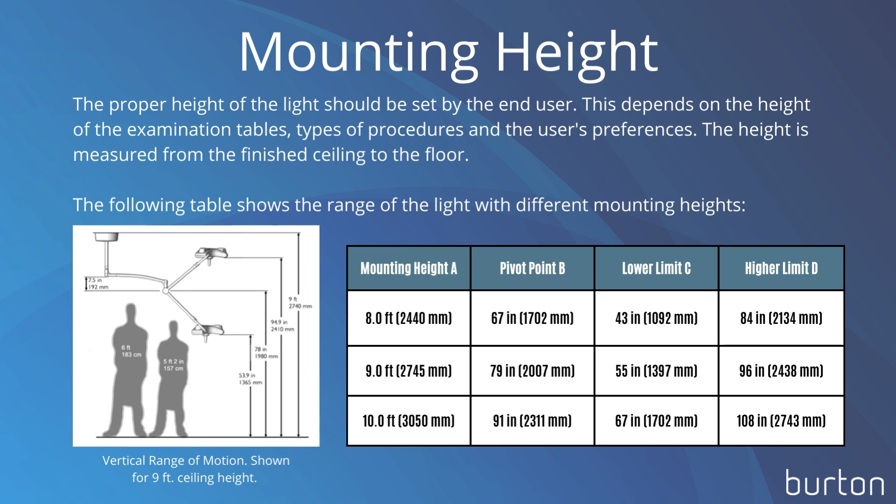Installing the wall mount, mounting plate. This image shows an example of a mounting plate, which requires a minimum thickness of 3/16, which can be used to mount the wall mount. The attachment method will vary depending on the type and structure of the wall. Please note that the mounting plate is not included.

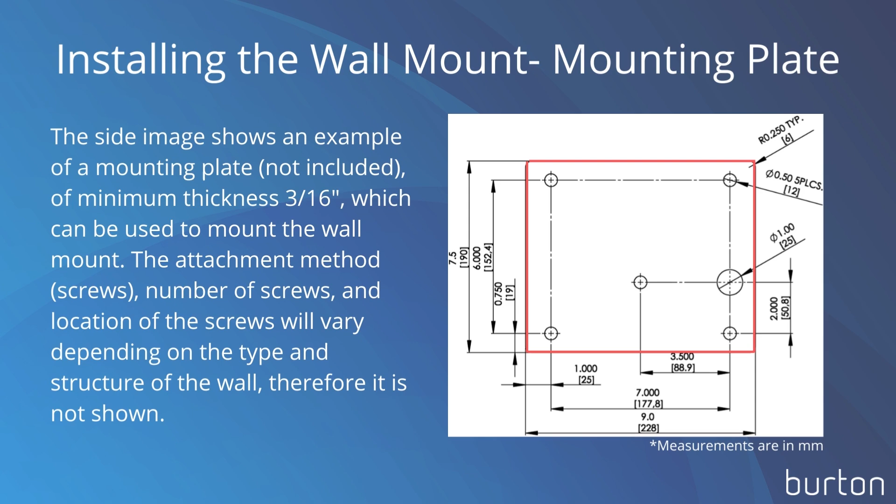Installing the wall mount, wiring. Below are two images, one of the wall switch installation for the wall mount model as well as a diagram of the wall mount wiring. Route conduit and electrical lines to wall mount. Use American wire gauge 18. Max American wire gauge 14.

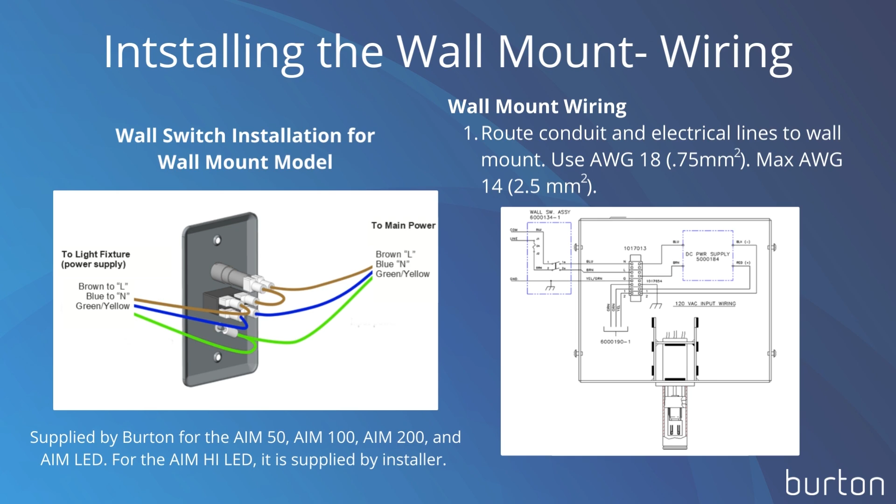Ceiling mounting height. The proper height of the light should be set by the end user. Due to the large vertical range of the light head, the standard 20-inch down tube will fit in most normal ceiling heights. The following table gives some recommendations and shows the range of the light with different down tube lengths.

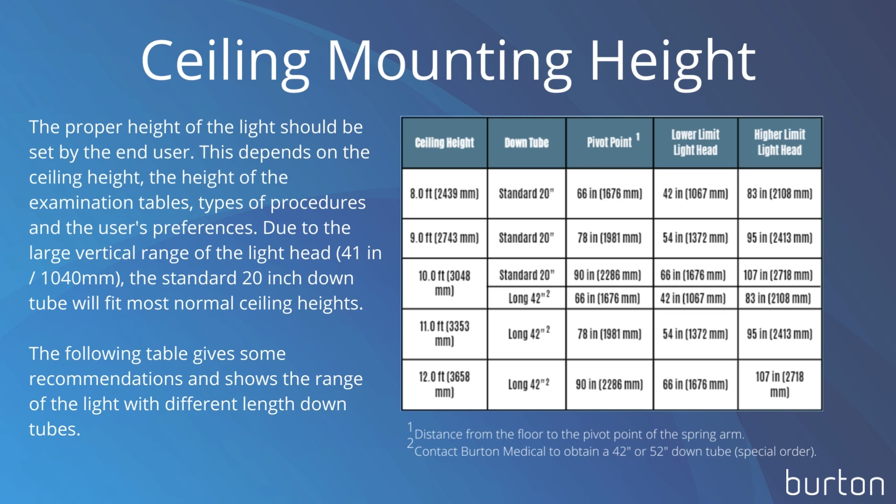Cutting the down tube. If shortening the down tube is required, the following procedure applies. Cut the down tube from the top to the appropriate length. Do not cut the down tube to less than 12 inches. Drill new holes on the top of the down tube according to the drawing.

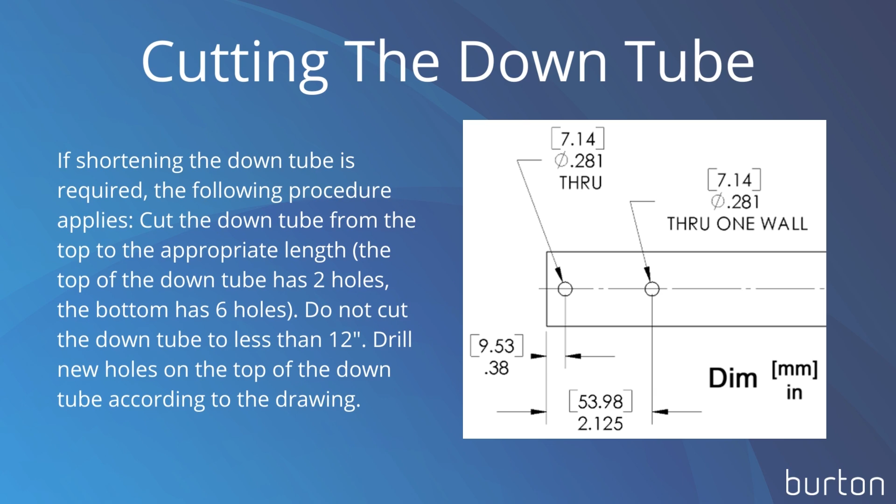The junction box and ceiling casting. The junction box should normally be placed on top of the support structure. Make sure the screw holes on the junction box correspond to the holes in the ceiling casting. When the ceiling plate is installed, the bolts will also hold the junction box.

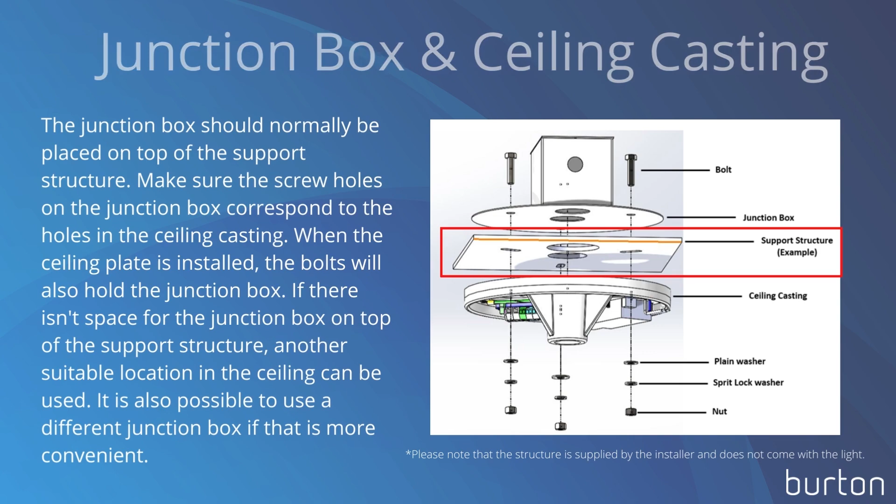If there is not enough space for the junction box on top of the support structure, another suitable location in the ceiling can be used. It is also possible to use a different junction box if that is more convenient. Installing the down tube. Slip the locking ring and the bell housing onto the down tube. Please note that the hole needs to extend all the way through.

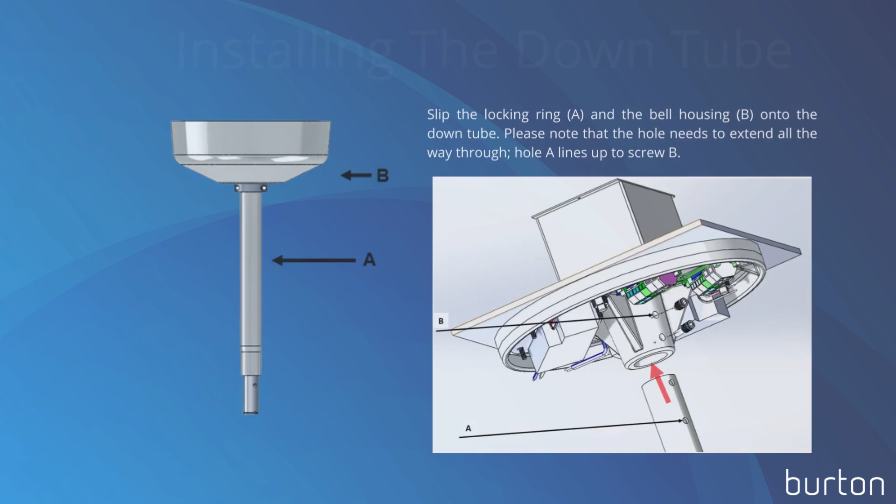Ceiling casting to the down tube. Approximately 1 inch of the down tube should be showing above the ceiling plate. The hole through the down tube will be accessible. Put the clevis pin into the hole. Secure the clevis pin with the cotter pin. Feed the wires coming up out of the down tube back down through the hole in the ceiling casting. The wires from the wall switch should also go through this hole. Please note that warnings are critical.

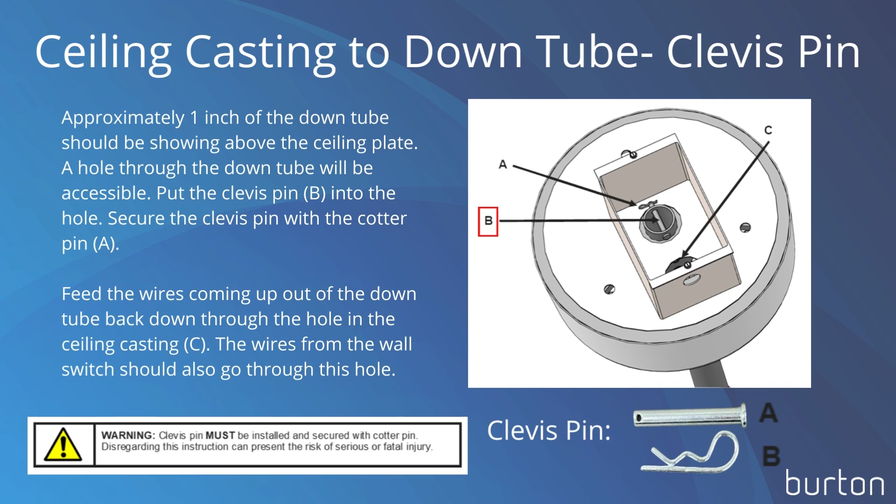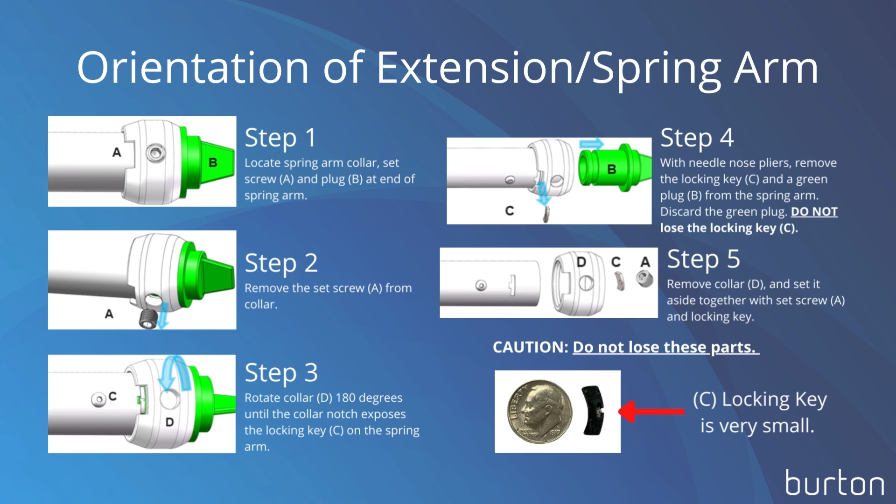The retaining ring assembly, spring arm. Remove the electrical connector or slip ring by unscrewing the two screws and placing them aside. Slide out the electrical connector from the tube and allow it to hang off to the side. Refer to figures 40 and 41. Slide the extension, spring arm assembly up and onto the ceiling mount down tube and hold it in place.

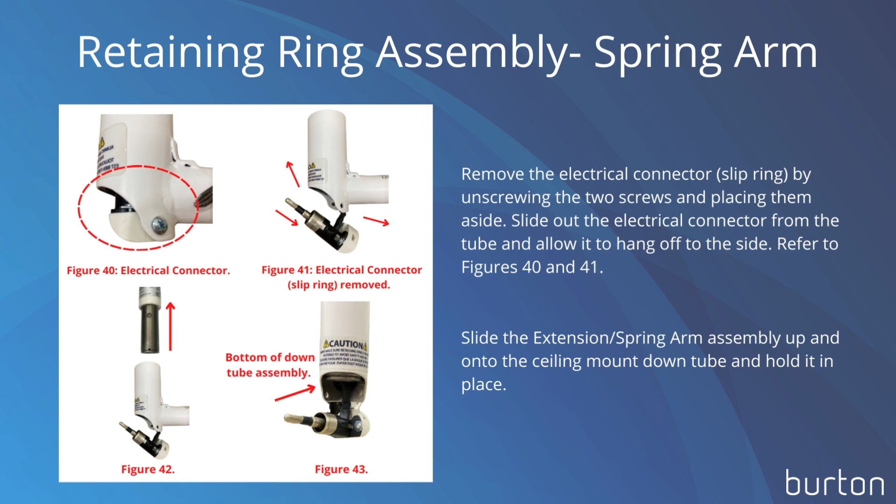The retaining ring assembly, spring arm continued. Install the retaining ring washer. Then install the safety washer with the notch facing into the hole and in the groove, and finally snap the two retaining rings into the groove. Please note that warnings are critical.

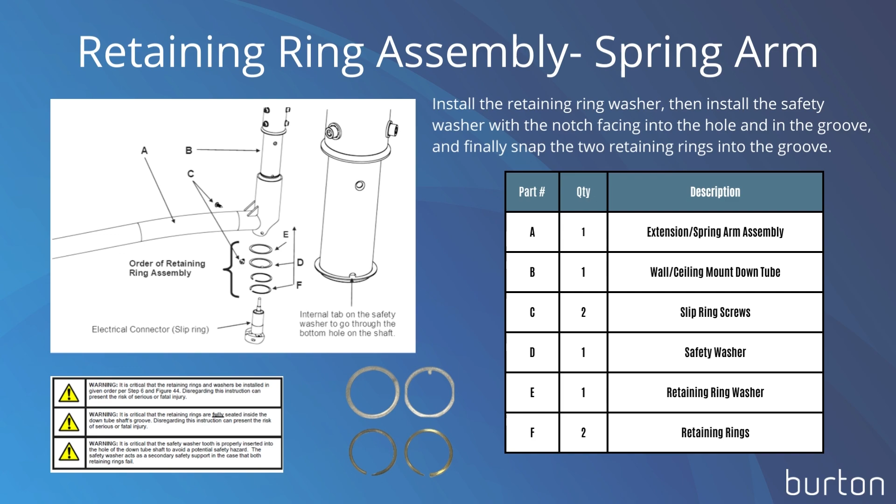Lastly, mounting the light head to the spring arm. Join the connectors, then push the joined connectors partially into the yoke T-junction. Do not bend or twist. Caution. Make sure the connectors are fully engaged. Make sure the plastic bearing is sitting on the yoke T-junction.

Push the yoke T-junction into spring arm. Push the locking key completely into the slot, so that the key is engaging in the yoke T-junction groove. Rotate the collar 180 degrees until the hole aligns with the set screw. Tighten set screw so that the collar cannot be rotated.

If the collar rotates, reposition the set screw hole to the arm hole and try again. Once collar does not rotate, give set screw another 1/2 turn. Caution! Do not over-tighten the set screw or damage to the collar can occur. Please note that warnings are critical.